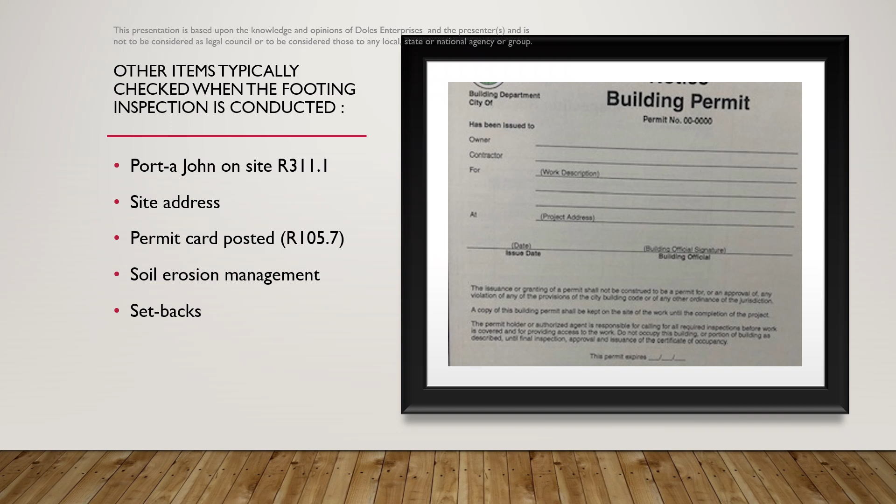Footings and foundation systems: in order to properly support the loads of a building, footing design must address not only the size of the footing, but factors such as the condition and characteristics of the soil, the footing depth, slope, and reinforcing. For other than engineered soil conditions, footings must bear on undisturbed ground and extend below the frost depth to provide a stable foundation.

In addition, exterior footings require excavation to at least 12 inches below the undisturbed soil. Vegetation, wood, debris, loose or frozen soil, and any other detrimental materials are removed prior to placing concrete.

To prevent sliding and to adequately transfer loads to the soil, the code limits the slope at the bottom of the footing to a maximum of 1 unit vertical to 10 units horizontal, or 10% slope. Transitions that would result in greater slopes must be achieved through stepping of the footings.

Soil bearing capacity and the average gravity loads determine the footing size. As the load-bearing capacity of the soil decreases, footing sizes increase to distribute the load to a greater area. The IRC prescribes the width of continuous footings based on the number of stories supported, the method of construction, the type of foundation—be it basement, crawl space, or slab on grade—the snow load, and the load-bearing values of the soil.

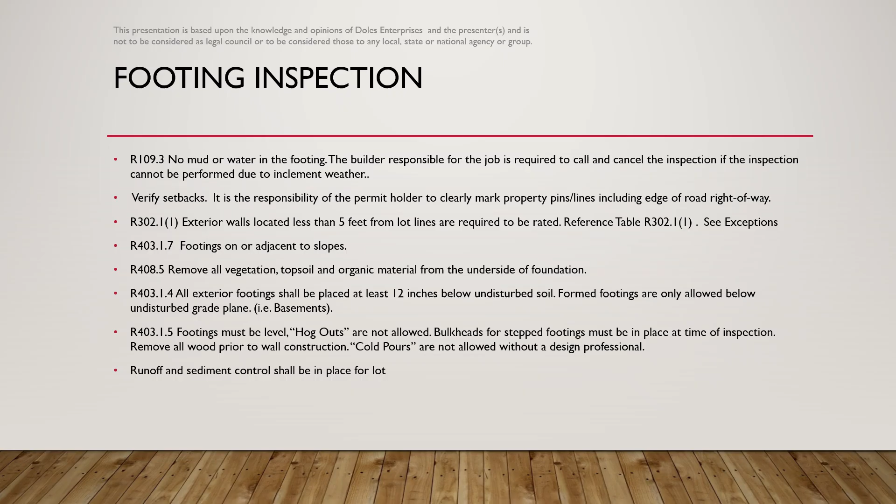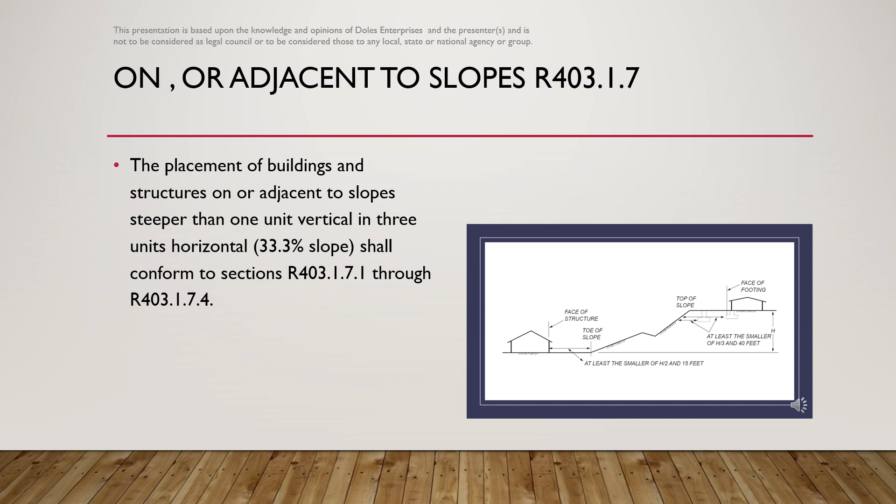The placement of buildings and structures on or adjacent to slopes steeper than 1 unit vertical in 3 units horizontal shall conform to sections R403 1.7.1 through R403 1.7.4. Where slopes are steeper than 33.3%, which is 4 inches per foot, foundations must be located a sufficient distance away from the slope to protect the integrity of the structure and provide adequate lateral support to the footing.

The clearance distance is based on the height of the slope. For a building located adjacent to the top of the slope, the descending area, the minimum distance is the height divided by 3, but does not need to exceed 40 feet. For a building located adjacent to the bottom of the slope, the ascending area, the minimum clearance is the height divided by 2, but does not need to exceed 15 feet.

The code gives the building official the authority to approve alternate setbacks with lesser distances to slopes based on design by a qualified engineer, taking all site conditions into consideration.

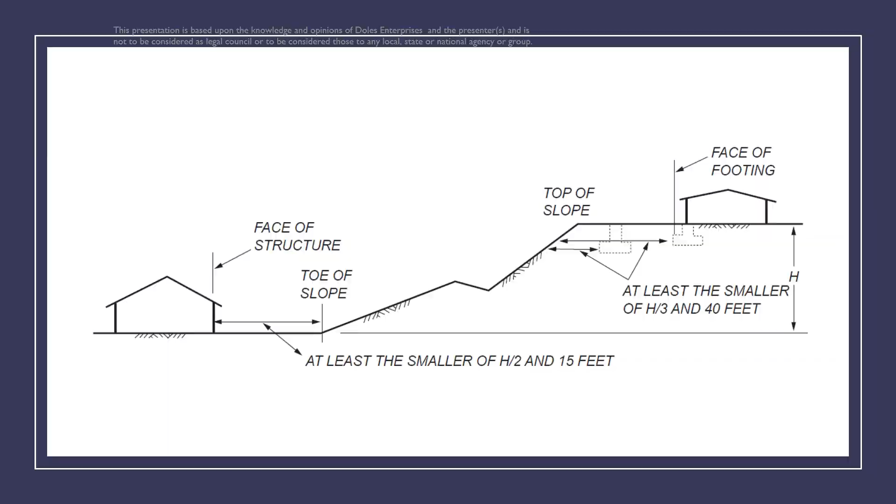For the most part, the IRC permits footings without reinforcement in seismic design categories A, B, and C for single-family dwellings. If rebar is used in the footing, it must be installed correctly. Wooden grade stakes, red brick chairs, inadequate concrete coverage, and improper splice lap ties are not allowed. Soil tests may also be required and will be discussed further. Vapor barriers are required when the footing is part of a slab on grade installation.

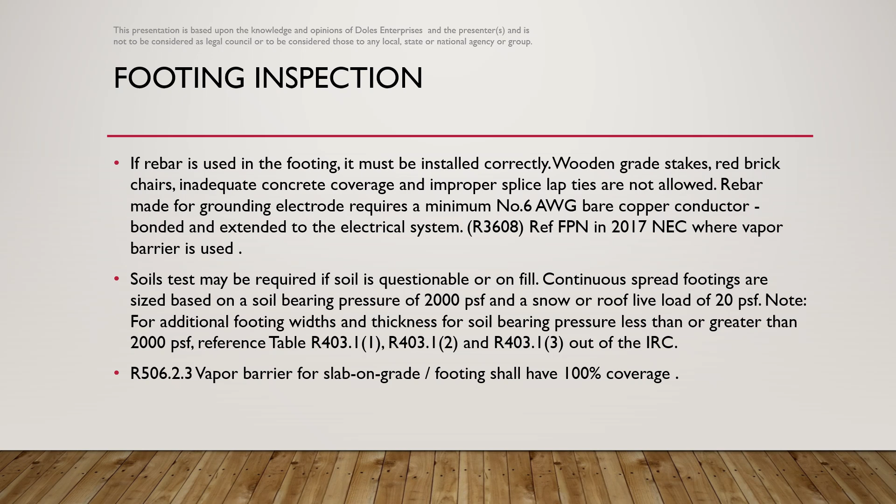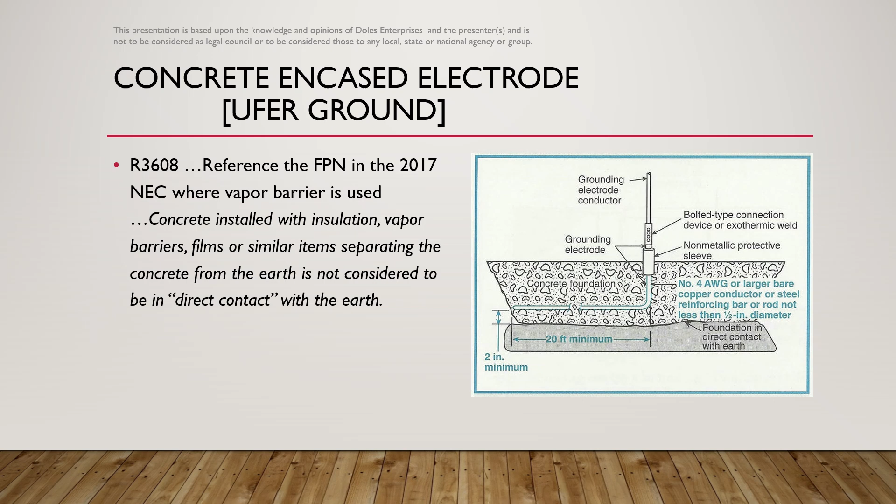Where rebar is provided in the system and the system is not otherwise exempt, the rebar must be part of the grounding system for the building.

Again, for the most part, the IRC permits footings without reinforcement in seismic design categories A, B, and C for single-family dwellings. Including rebar in a concrete footing means you can reduce the risk of concrete being pushed and pulled apart or cracking from ground force pressure. Knowing this, it is generally a good idea to use rebar in footings for any structure. However, it is not required in many cases by the code.

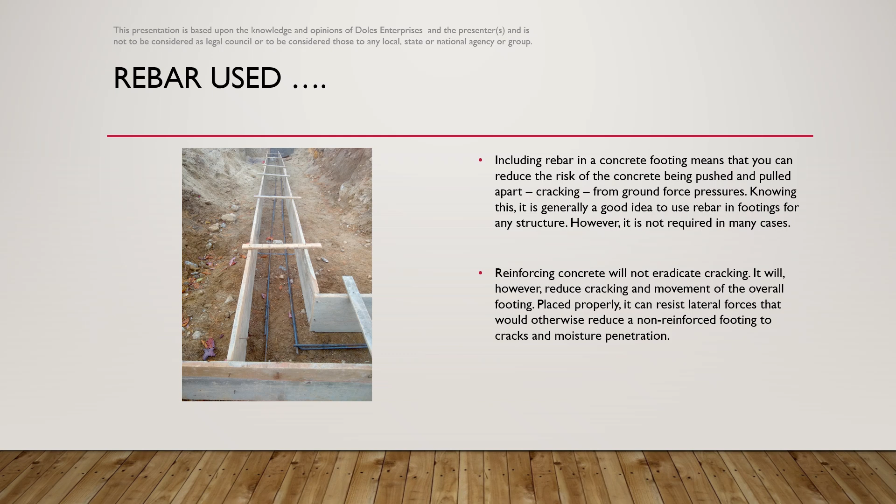The designer or builder must carefully consider soil properties not only for adequate support of the foundation, but also for stability to prevent future damage to the structure.

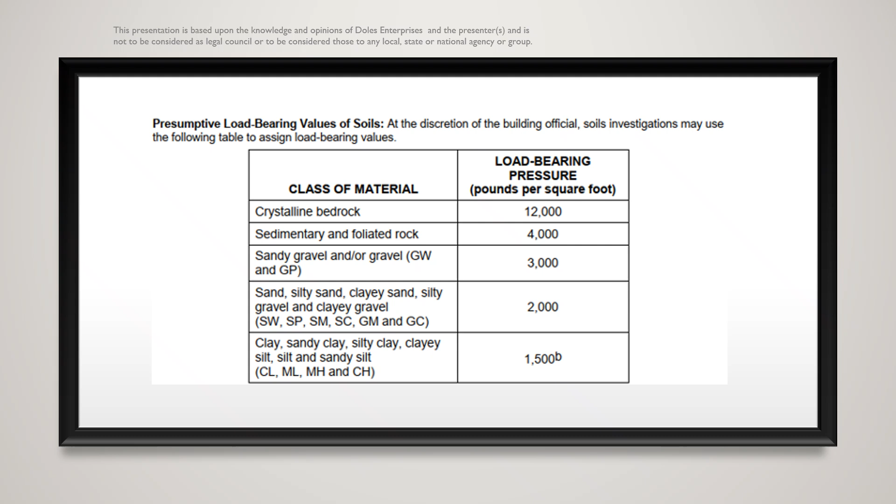Based on experience and known local soil conditions, the building official will often permit design based on presumptive load-bearing values without soil testing or a geotechnical report. Where available data indicates that the soils may not be suitable for the foundation design, the building official is authorized to require a geotechnical evaluation and report prepared by an approved agency or registered design professional.

Expansive, compressible, or shifting soils have the potential to damage the structure. In addition to organic materials, certain inorganic clays and silts are highly expansive. Such soils expand when wet and contract as they dry, exerting significant pressure against the footing and foundation and thereby causing shifting or differential settlement that could result in structural failure.

Expansive soil conditions require an engineered foundation design in accordance with the International Building Code. In some cases, it may be possible to remove unsuitable shifting or compressible soils from the building site and replace them with approved fill to stabilize the soil below and around the foundations. Under these conditions, the IRC permits a prescriptive foundation design without a full geotechnical evaluation.

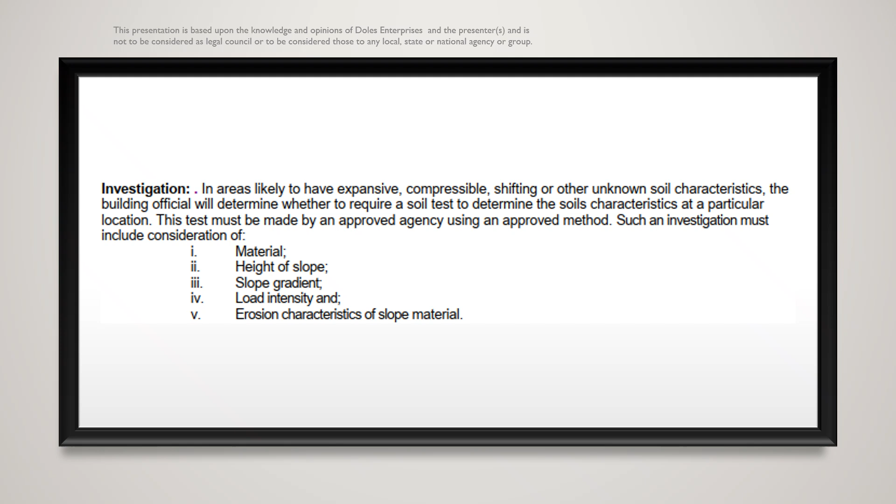Slab on grade inspections.

Proper operation of the sanitary drainage system depends on adequate pipe size of approved materials, appropriate slope and support, transition fittings suitable for the location, adequate cleanouts, and proper venting. The code requires specific approved methods for joining and connecting drainage piping to provide a gas-tight system with optimal flow.

Cast iron pipe is typically connected with compression gasket joints or mechanical couplings. PVC DWV pipe joints are solvent cemented. These two different piping materials may be joined together with approved mechanical couplings.

The code prohibits a reduction in size in the direction of flow. Fittings for change in direction must be suitable for the installation to maintain acceptable flow and reduce the possibility of stoppage. For example, sanitary tees are not permitted for vertical to horizontal or horizontal to horizontal transitions. Such changes in direction are commonly accomplished with a Y, a combination Y and 1/8 bend, or long sweep fittings.

The general rule for minimum pipe slope is a 1/4 inch vertical drop for each 12 inches of horizontal run, a 2% slope. A minimum slope of 1/8 inch per foot, or 1%, is permitted for pipe sizes 3 inches or larger.

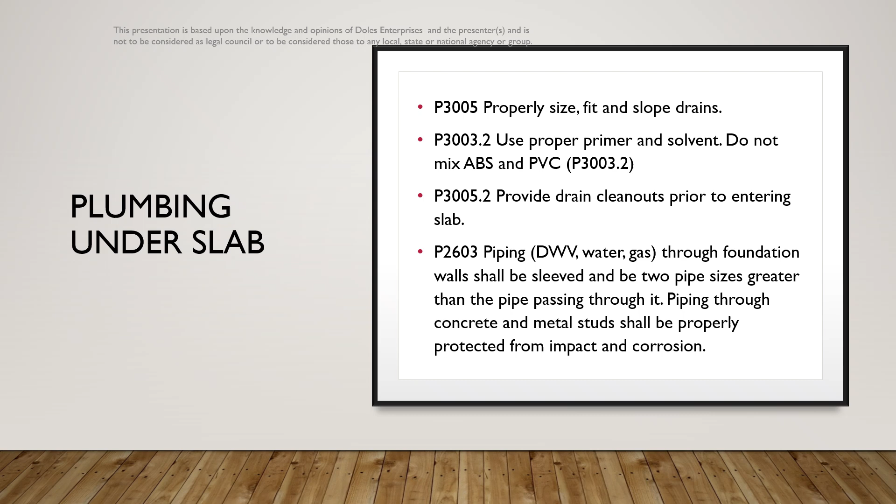In our area, we typically see plumbing systems under slab tested with a 10-foot head pressure. Code provisions recently changed to allow a minimum of 5 foot. It is important to remember that this is a water test. For PVC, you cannot use air pressure. There are certain hazards inherent to that type of application. Please keep this in mind.

Also keep in mind that the piping through the foundation walls or under the footings should be sleeved with a sleeve at least 2 pipe sizes larger than the pipe passing through it.

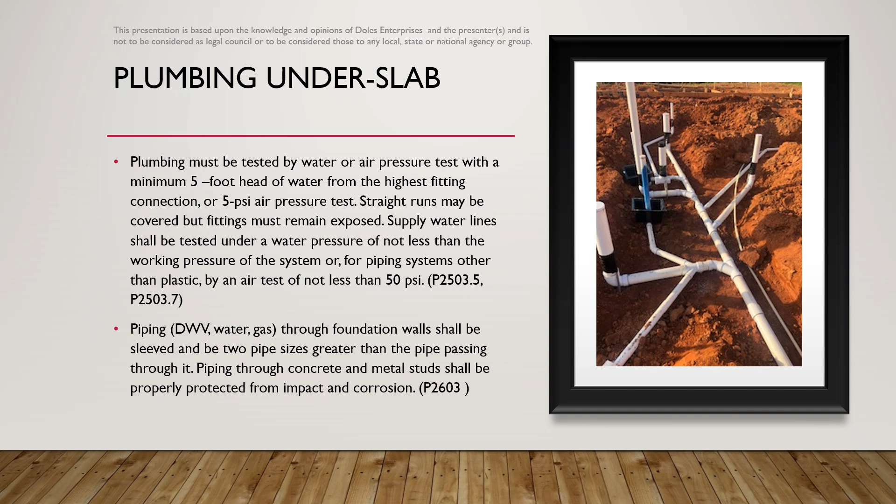To review, the DWV system shall be tested with a water head pressure test for at least 15 minutes. The water test is required for DWV PVC systems. For cast iron or other products, you may use other methods as approved by the manufacturer. Keep in mind that air is not permitted to be used for a testing mechanism for the underslab PVC DWV system.

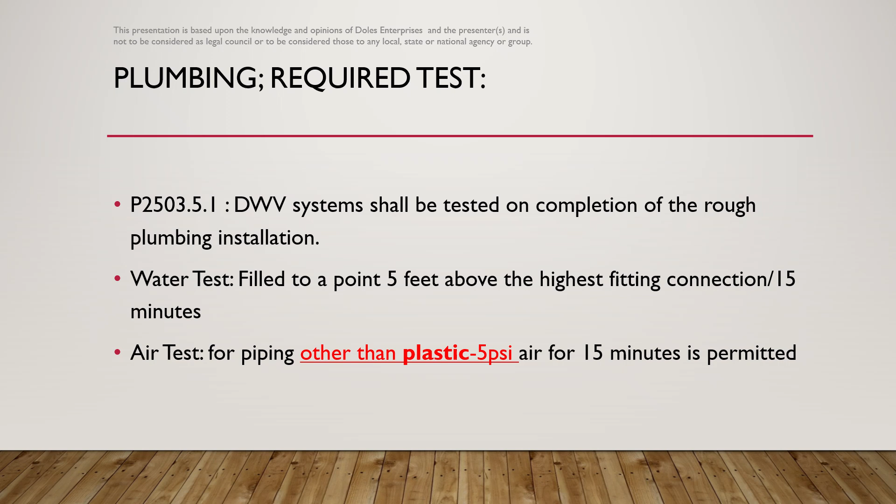Other plumbing under slab issues to consider include that water distribution piping shall not be in direct contact with concrete. A sleeve is required where the piping passes through or under the footings. Grade shall comply with the International Plumbing Code and the IRC applicable provisions. No sanitary tees on a horizontal plane, and all fittings must comply with IRC P3005.1. Solvent, cement, and purple primer, there are special exceptions on these, which we will discuss later.

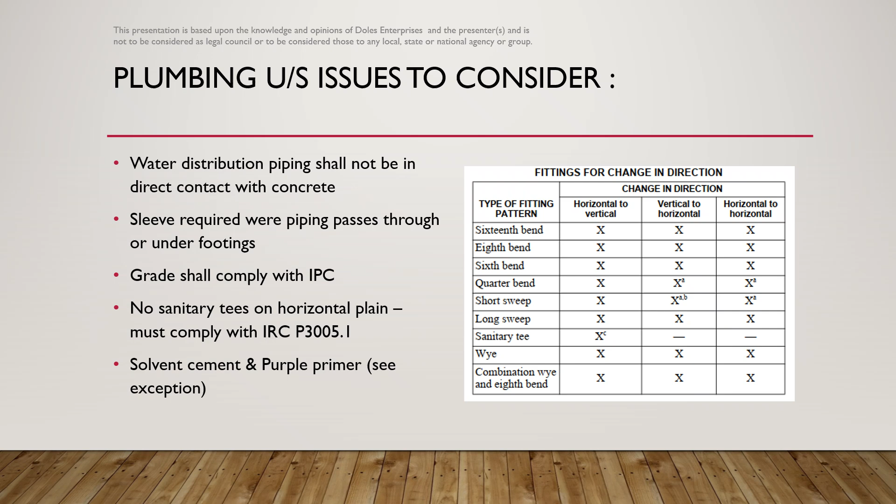Other under-slab rough-in considerations may include rough-in for radon in areas where radon protection means are required. Also, certain termite treatment requirements, depending on the jurisdiction and area needs.

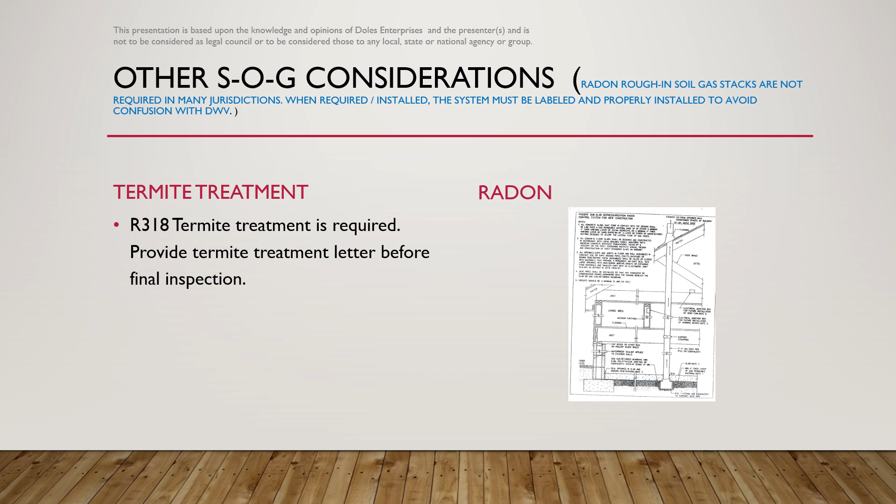To continue with our slab on grade inspections, bearing points for columns and bearing walls should be clearly defined at the inspection, including footings for porches, decks, patios that support loads above.

The slab on grade within the building envelope and garages require a minimum 6 mil vapor barrier placed over a 4-inch thick base course of gravel or stone under slab on grade. Slabs must be a minimum 3.5-inch thick and capable of carrying all loads.

R506.2.3 vapor retarder: 6 mil with joints lapped not less than 6 inches. 100% coverage to separate concrete from earth. Seal all penetrations of the vapor retarder. Again, garage floors must be sloped to facilitate movement of liquids. This is R309.1.

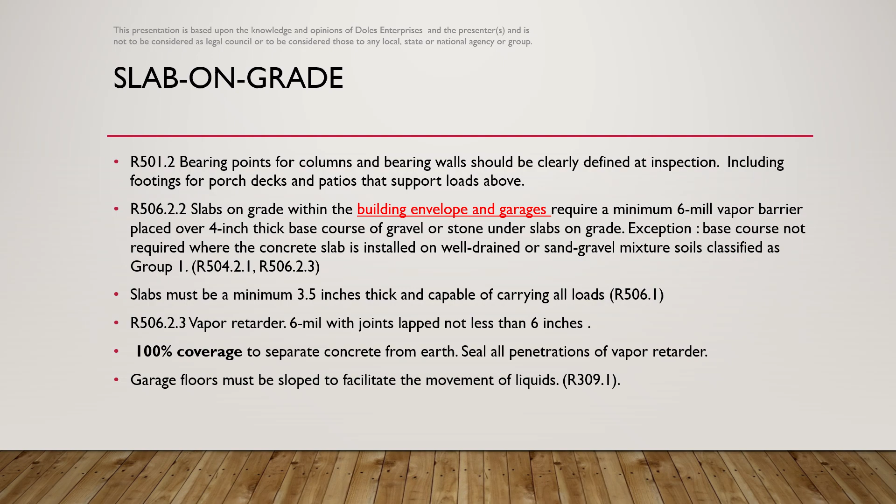I want to speak a few moments concerning vapor retarders. First, let's look at the code. R506.2.3 vapor retarder: a 6 mil polyethylene or approved vapor retarder with joints lapped not less than 6 inches shall be placed between the concrete floor slab and the base course, or the prepared subgrade where no base course exists.

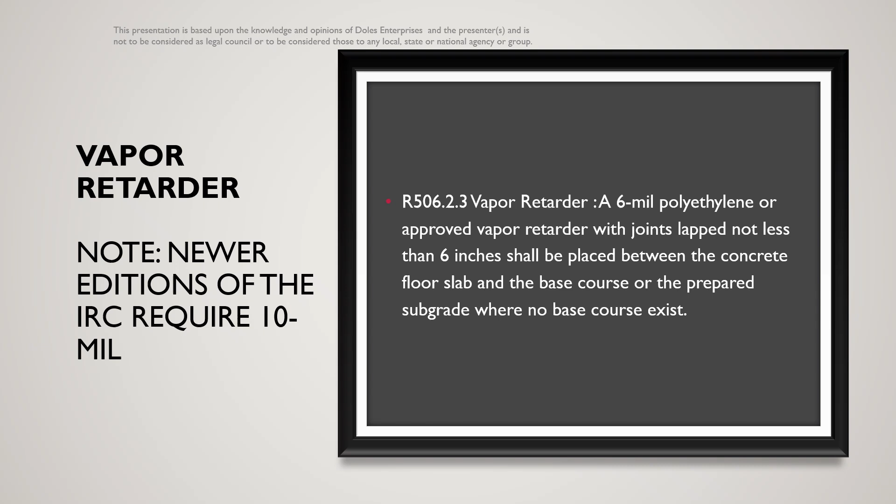On a recent upstate South Carolina slab on grade inspection, the following was encountered. As you can see from the photographs, we have a perimeter footing with number 4 rebar. We also have interior footings to carry load bearing above.

However, if you notice in the photographs, the vapor barrier, a 6 mil vapor barrier or vapor retarder, does not provide full coverage of the area. The code, while it does not say 100% coverage, says that the vapor barrier shall be provided to provide separation between the earth and the concrete slab.

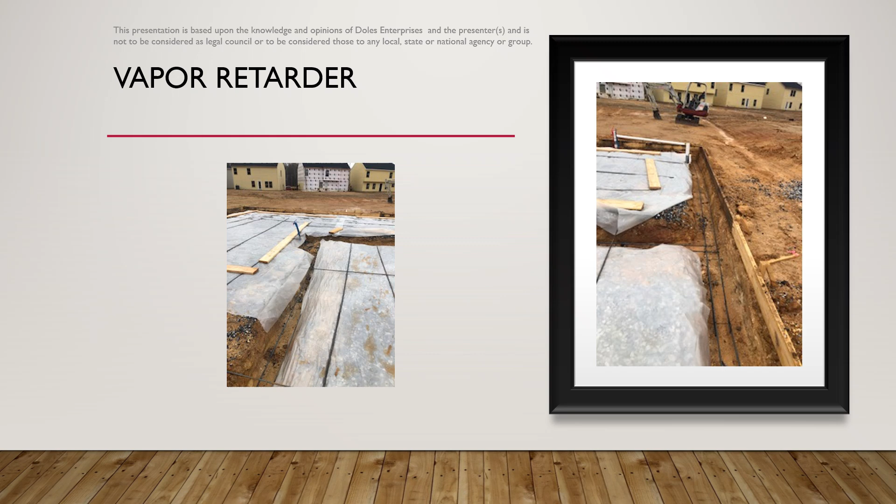This is an issue that becomes very difficult for people laying floors. With the progress of house building in the upstate of South Carolina, where homes such as these in this subdivision are completed in less than 90 days, the concrete is not even fully cured at that point. So floor covering becomes an issue, but more importantly, we have a code issue. The code, while it does not say 100% coverage with a vapor retarder, still says it provides separation. There are various schools of thought on this, and we'll expand on those in a few minutes.

In the few minutes we can spend on this subject, I'd like to touch upon the importance of having 100% coverage of a vapor retarder. In this picture, we'll see that we have a vapor barrier separating the earth from the concrete. Typically what we see in the upstate of South Carolina is this vapor barrier will turn down to the footing and it stops right here.

What this does is allow all this concrete to have direct contact with the earth, here and here. This speeds up the process of capillary motion of moisture wicking through brick and coming up into the flooring.

The issue we'll run into is if we have wood flooring, laminate, or even carpet flooring, we're going to get moisture content values greater at the perimeter of the home than at the interior sections. The code does not have language that says specifically 100% coverage.

It says coverage. It doesn't say 10% coverage, it doesn't say 50% coverage, it doesn't say 100% coverage. My interpretation is that we should have 100% separation of earth from the concrete. That means complete separation, with the full area covered with 6 mil poly.

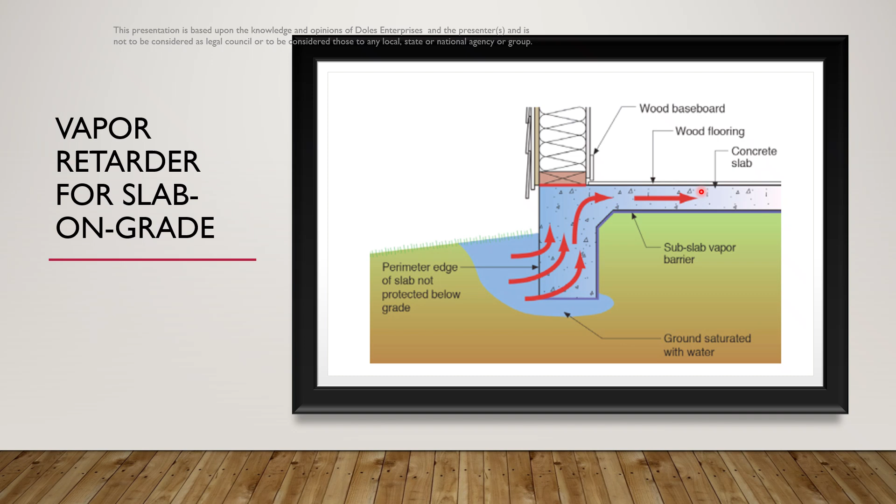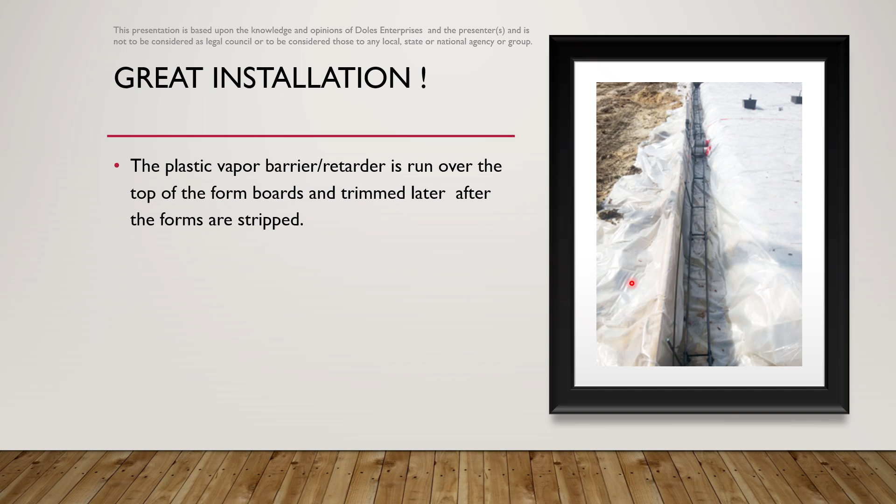Depending on climatic conditions, significant amounts of condensation can accumulate in enclosed crawl spaces, causing decay and other damage to the structure. The code requires ventilation openings through the foundation or exterior walls, in the prescribed size and location, to circulate air and dissipate condensation. An alternative method permits a crawl space without foundation openings when equipped with mechanical exhaust ventilation or connection to the conditioned air supply of the dwelling.

In this case, the code requires insulation of the exterior walls and a vapor retarder on the ground, sealed to the enclosing foundation wall. The IRC requires access to the underfloor space.

Concerning the foundation and crawl space, backfill should not be placed against the wall until the wall has sufficient strength, anchorage, and bracing. Waterproofing and foundation drainage, a French drain, should be installed at this time. Foundation drainage shall positively slope to daylight as site conditions warrant.

Exterior waterproofing and drainage systems are required on all basements, storage spaces, habitable spaces, and when the inside grade of the crawl space is lower than the finished outside grade. Repeat: when the inside grade of the crawl space is lower than the finished outside grade.

R606.4.3: Masonry walls shall be solid units or grouted at a change in thickness.

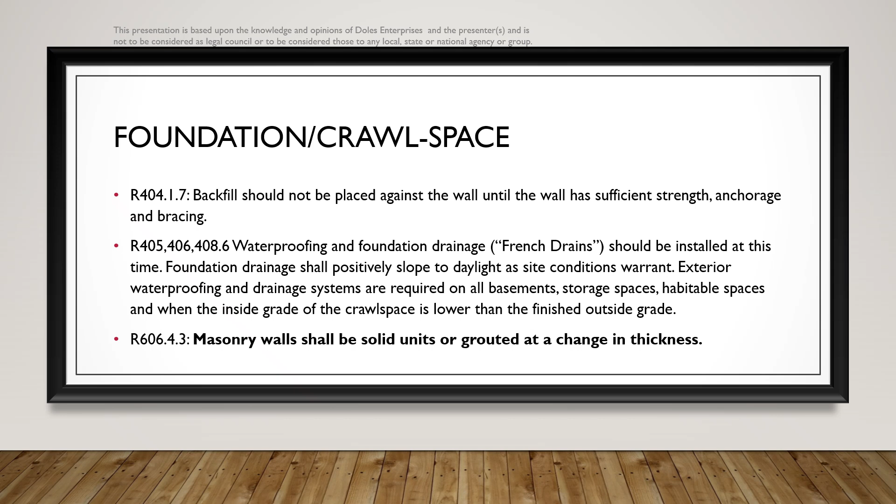Foundation crawl space considerations continued. Underfloor spaces containing mechanical equipment shall be provided with an unobstructed passageway large enough to remove the largest appliance, but not less than 30 inches high by 22 inches wide and no more than 20 feet in length. This is found in M1305.1.4 of the 2018 IRC.

The minimum net area of crawl space ventilation openings shall not be less than 1 square foot for each 150 square feet of underfloor space area. One opening shall be within 3 feet of each corner. If the ground is covered with an approved vapor retarder, the ventilation openings can be reduced to 1 square foot for each 1,500 square feet of underfloor space. Please note that the standard 8-inch by 16-inch foundation vent does not equal 1 square foot of ventilation.

8-inch CMU piers cannot exceed 80 inches in height. 8-inch CMU piers over 32 inches must be filled solid and capped. Hollow piers shall be capped with 4 inches of solid masonry or concrete, or shall have the top course filled with concrete or grout.

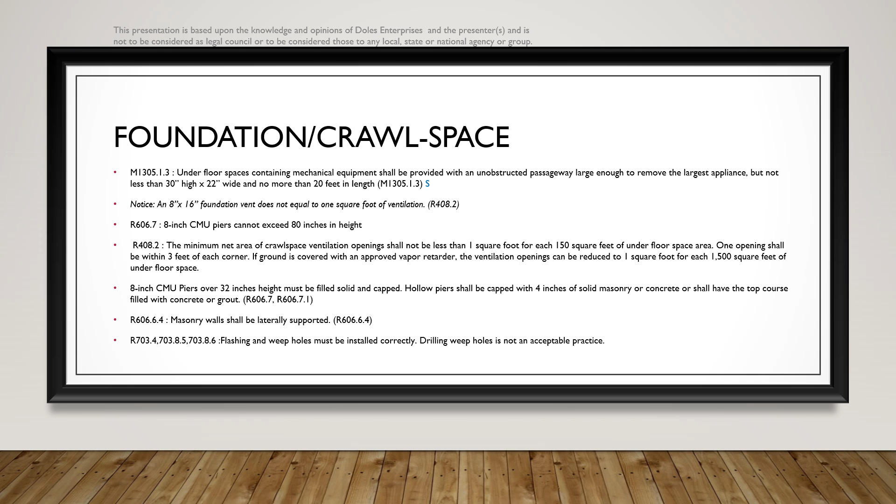Masonry walls shall be laterally supported per R606.6.4. And concerning flashing and weep holes, they must be installed correctly. Drilling weep holes is not an acceptable practice.

So let's talk a little bit more about these 8 by 16 foundation vents. The one you see in the picture is pretty much typical, the kind you get at a big box store. This 8 by 16 foundation vent doesn't quite comply with the code. If you look on the vent closely, you'll find it gives you the net free ventilation area opening and the total. You'll find out it's probably going to end up being between 45 to 65 square inches, so of course it's not going to comply with the code.

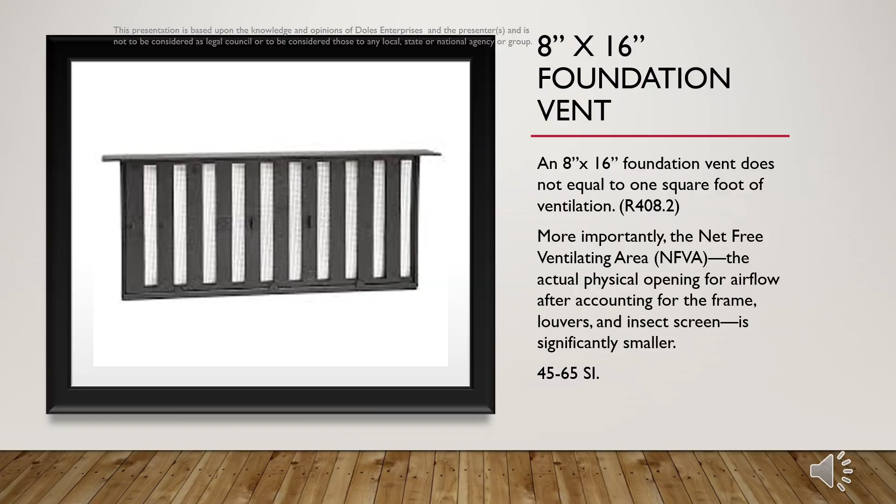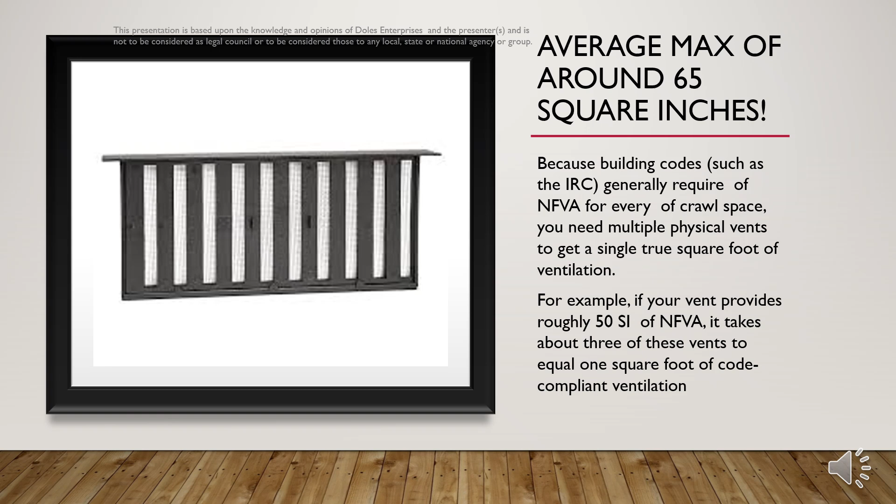Look at these very closely, because they're going to cause you to have to put in more foundation vents. Building codes such as the IRC generally require that the net free ventilation opening for every crawl space meet certain requirements, which is 12 by 12, or 144 square inches. You're going to find you have to use a lot more of these foundation vents. A good example: if your vent provides roughly 50 square inches, it's going to take 3 of these vents to equal 1 square foot of code compliant ventilation. So look at these very closely. Usually the square inches of net free ventilation opening is inscribed or stamped somewhere on the device.

And to review, 606.6.4, masonry walls laterally supported. This is common sense stuff. When you're standing up these walls, you've got to provide support. You can't just rely on what little bit of rebar gets put in there every 4 to 8 feet. So you have to have support for these things until they completely cure to a safe degree.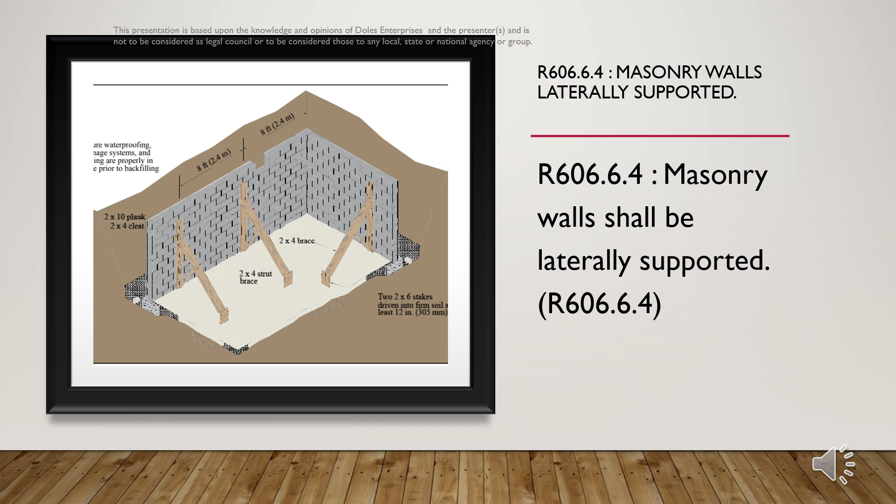And don't forget that weep holes are critical to a brick veneer type finish on a house. Remember that brick is a siding product, but it has to be able to get rid of any moisture it might trap in the interior space. Drilling a weep hole after the fact is just not acceptable. Flashings and weep holes are critical to a good, safe installation.